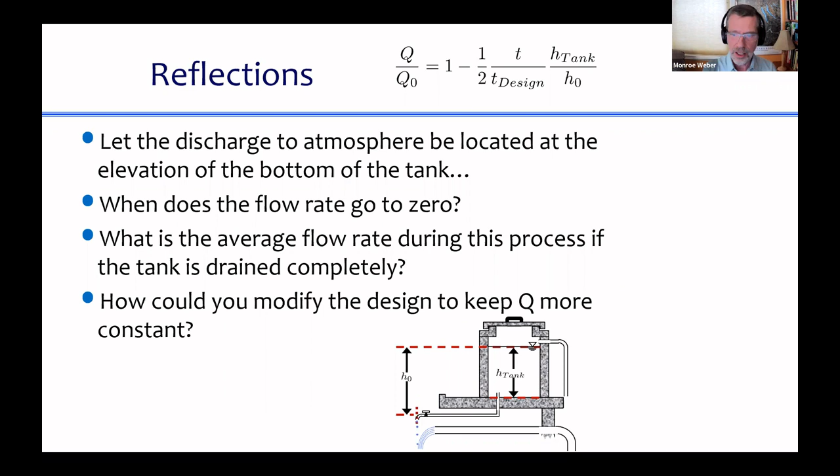We looked at one option: essentially a tank with a hole in the bottom. We realized we don't get constant flow rate, because the pressure or available energy that's there to push the chemical through the valve or orifice is decreasing as the chemical is being depleted, since it's being used. So that's problem number one—the change in head of the stock tank is going to cause us problems. That analysis, as a little aside, does get us something interesting.

We'll use that to design the system for emptying tanks, for draining tanks, because that's what it's doing—it's draining a tank, and in a water treatment plant we need to drain tanks. For example, this morning I was working on updating our flocculator, and the flocculator needs to have a drain system in it so that if you need to take it offline, you can open up some pipe ports and the flocculator will drain quickly, and then you can do maintenance on it. So there needs to be a design for that drain system. That's coming up in a second.

But I wanted to stress that what we discovered so far that was difficult is that the amount of chemical in our stock tank is changing over time, or the flocculator tank is draining over time, and so the flow out is going to be changing as well. We can figure that out using a combination of the energy equation and perhaps a minor loss coefficient, a minor loss equation.

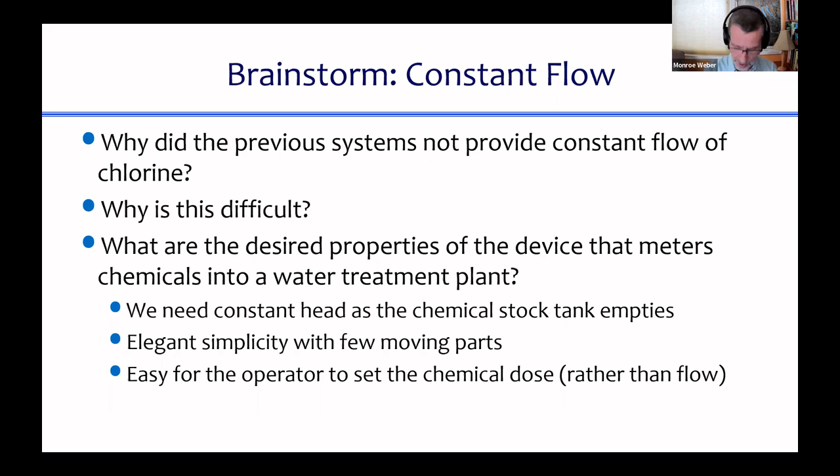So what we're looking for is a device that has a constant flow rate, even though the chemical stock tank levels are changing over time. We need some way to have a constant source of energy, of head, pushing the chemical through our control system. We'd like it to be elegant and simple with few moving parts, and we're not happy with just one flow rate. We want the operator to be able to easily adjust something and get a whole range of flow rates, without having to do that by trial and error. So those are things that we would like.

I said I'd do this quick aside on what's happening with draining a tank and trying to empty it. So you've got a tank, maybe an elbow at the bottom, and maybe a valve in that elbow. The equation I'm showing is a rework of the equation from a couple slides back, and it relates the minor loss coefficients—the sum of Ke, all the minor loss coefficients—the height of the tank, the width of the tank, the length of the tank, and the time you're willing to have it take for the tank to drain, and it gets you the required diameter of the pipe.

So it's a very simple, elegant equation that tells you how big the diameter should be on your bathtub drain if you want it to drain in less than 5 minutes, okay?

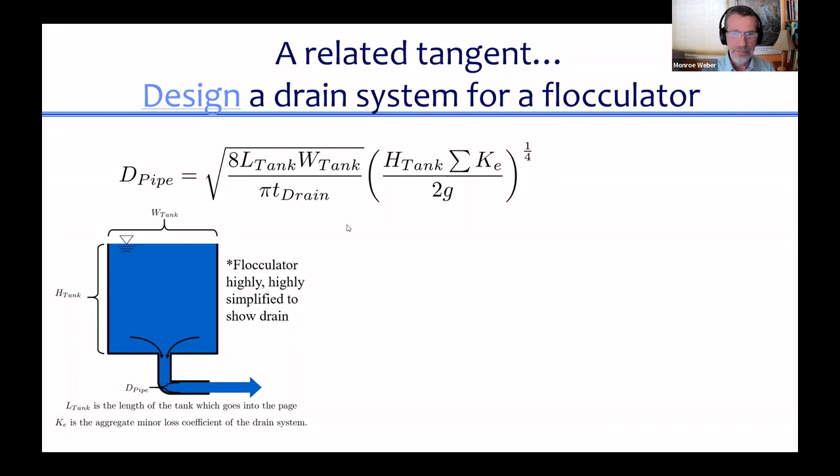So we use that equation or a similar version of it all the time. And just to make this real, these are the drains on the bottom of the sed tank - that's part of what went into determining how big those valves needed to be.

You might say, how did you figure out what that drain time should be? There's a trade-off here, because if you want to drain the tank in 15 seconds, you're going to need a monster pipe and a monster valve, and that's going to cost you a lot of money. But if it takes a week, your plant operator is highly annoyed because it took too long. So essentially, you're trying to figure out how long can I make this take and it not be annoying for the plant operator?

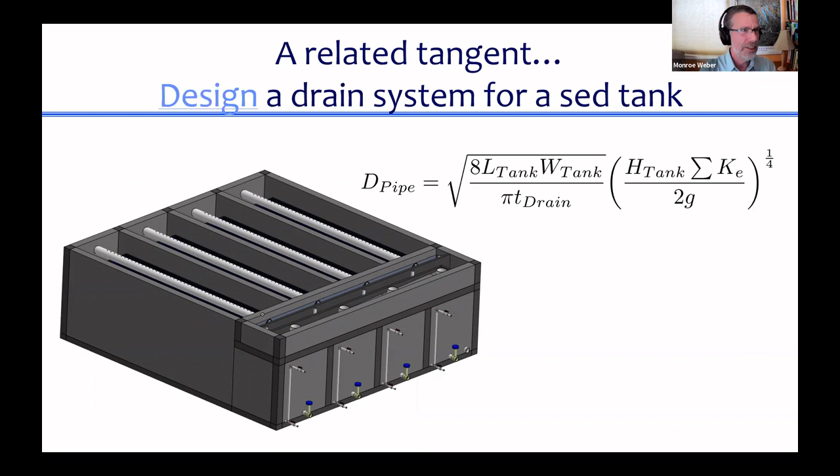My guess is that the length of time it should take to take a unit process offline and drain it is something like 15 minutes. If it's taking longer than that, the plant operator is going to be like, why is this taking so long? So that's where that time came from. It's really trying to understand the world from a plant operator's perspective that guides that decision.

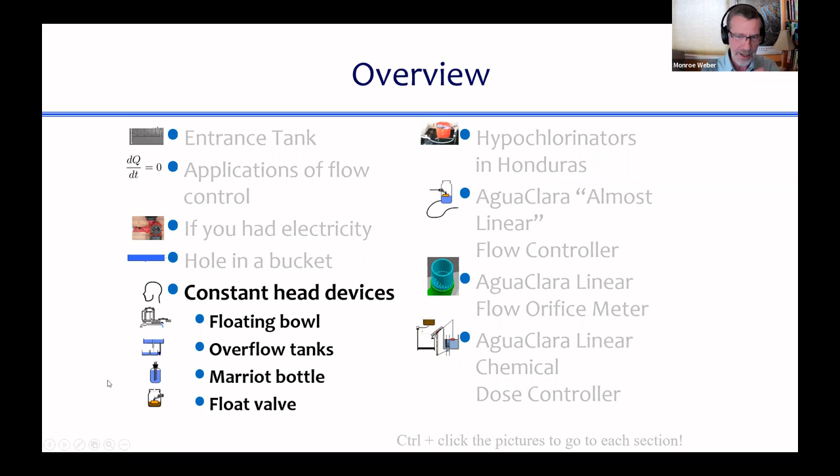So now we know we've got this problem of the head, or the level of the stock tank, varying. We need to figure out a way to get that out of the problem. So we want constant head devices, and we're going to talk about a few. I wanted to tell you where we're going - this is just a preview of where we're going eventually, hopefully by the end of today.

This is a view of the entrance tank and our doser system that is going to control the dosing of chemicals into that tank, sitting here. Unfortunately, I don't have everything shown yet, so the tubes that connect to this are not yet drawn. Hopefully by the end of this course that will all be finished and it'll be beautiful, but that's still a work in progress. So what happens if the flow rate through this entrance tank is 0?

You can see the scale on the wall there. If the flow is 0, the water level is way down in there, and there's a float on that lever system that is causing the lever system to angle and be, at this point, basically horizontal.

As the flow rate increases - so now I set the flow rate up to 50% of max. This plant is designed for 20 liters per second, it's running now at 10 liters per second. The water level has come up in the entrance tank by 10 centimeters, and that lever system has pivoted, and the level of these two outlets has changed because of that. We'll connect to that eventually.

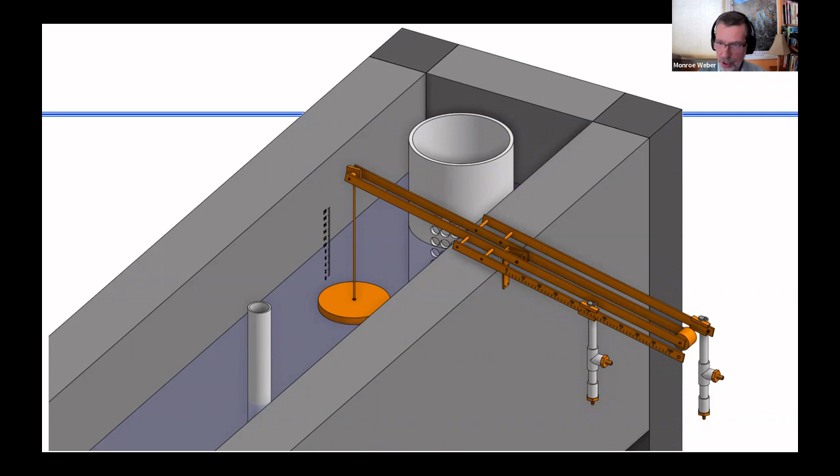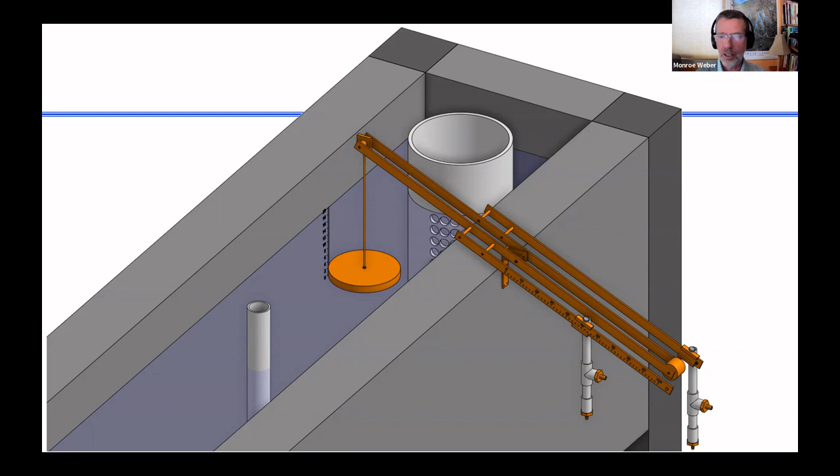This is at an even higher flow rate through the plant, and that lever system has moved even further. So this is our solution. What we're going to do today is slowly walk through and figure out how did we come up with this crazy design that ends up making it easy for a plant operator to adjust and control the chemical flow rate. So that was just a teaser.

Here's some of the pieces of that. So the first problem was, how do we get a constant head, which is get rid of the problem of the chemical level changing in the stock tanks.

A really cool idea that's been around for a long time is that you have a tank with your chemical in it, and you have a float - think a little plastic basin that's sitting inside that tank. And there's a flexible tube, this vertical tube that I show here. Don't ask me how it's nice and vertical and also flexible, just don't ask.

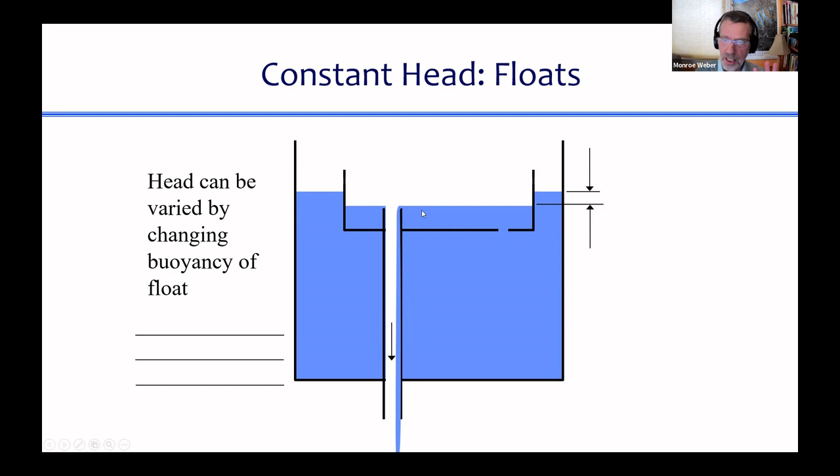And the flow into this float is set by this little orifice that's letting chemical flow in. And the driving head is that delta H - that's what's pushing the chemical from the stock tank into that little float container.

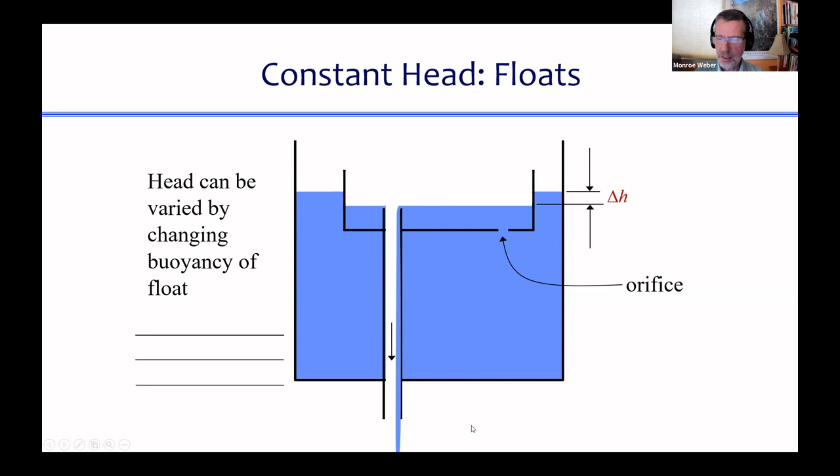And then that little float container has an overflow, and it's falling in free fall down through that dosing tube. And that pipe has supercritical open channel flow, which means it's free fall. What's really important about this idea of free fall or supercritical flow is that anything happening downstream in that tube transporting our chemicals cannot in any way influence how fast the chemical is entering at the top, because what's happening at the top is it's falling over the edge of a weir, and downstream doesn't influence it at all.

If you're puzzled by that - if you are at Niagara Falls and you do something to increase the water level downstream of Niagara Falls, that has absolutely no influence on the amount of water going over Niagara Falls, right?

So there's supercritical flow over Niagara Falls. What happens downstream is irrelevant to how much goes over. Climate change isn't going to affect us.

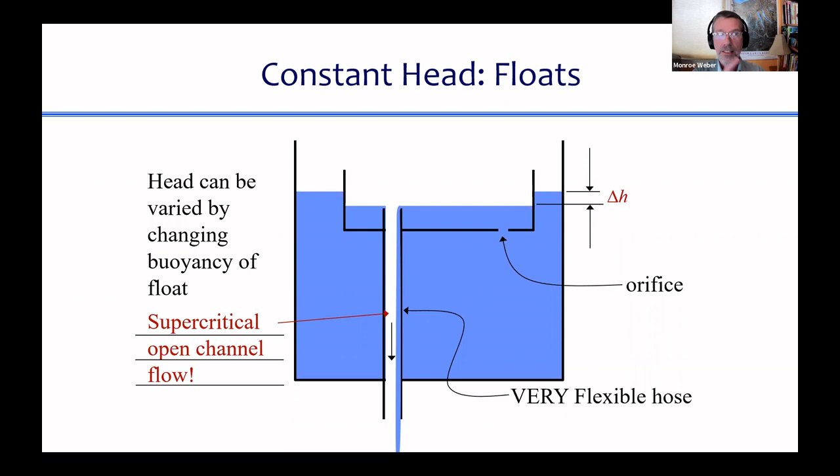Same thing happens here in that falling tube, and we're going to use that because that ends up being important. So it's unaffected by downstream conditions.

Here's an example of this. Remember, I showed you this little tank sitting on top of a big tank, a little chlorine tank sitting on top of a distribution tank for a village. And what I didn't show you is the original design. So here's the original design. There was a little float, and that float might have been like 4 PVC pipes in a square held together with 4 different elbows. Did you all draw that in your head?

The air in the PVC pipes is low density, so that frame is going to float on the surface of the chemical. And that float is then connected to a flexible tube, and the flexible tube has an orifice in the side of it.

So now it's almost the same as what we had before, maybe a little bit more elegant, where the pressure that's pushing the coagulant or the chlorine through that orifice is based on how deeply submerged that orifice is in the chemical. And as the chemical level drops, the float goes down with it.

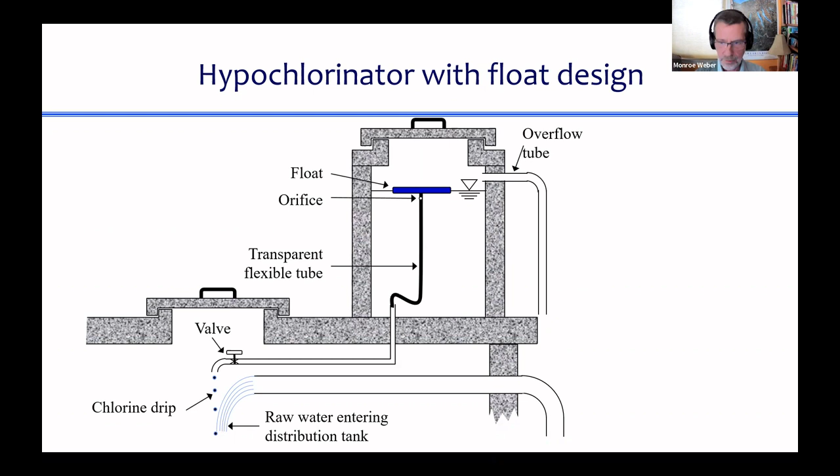So the height of chlorine above the orifice remains constant. So our goal is to adjust the flow rate and maintain it constant. That means we have to control the head, and we can think of the head like electricity. When they teach electrical engineers about electricity, they probably explain it's kind of like water. So now as civil and environmental engineers, when we talk about water, we need to teach you that it's kind of like electricity.

Have you all at some point learned something about resistance, voltage, and current, and got those relationships? Maybe some of you have. Okay, so head, which is what we talk about in civil engineering, refers to elevation change, analogous to pressure. It's the energy available to push fluid through a flow resistance.

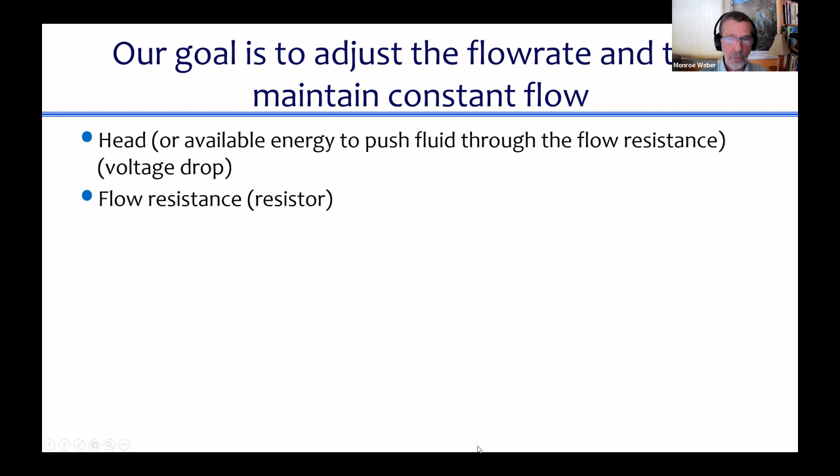That head is like a voltage drop, a change in voltage. And then we're going to have a flow resistance that could be the orifice, and this flow resistance is like the resistor in an electrical circuit. So one option is an orifice. Another option is porous media.

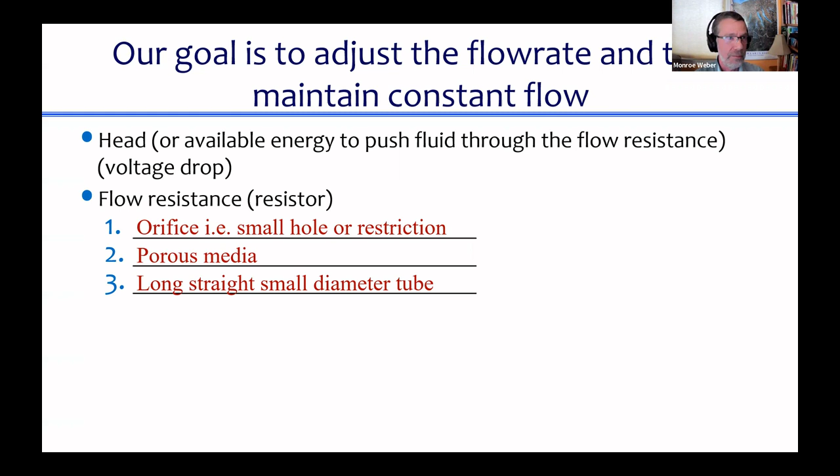This is just brainstorming about crazy things. We can put a bed of sand and have water flowing through sand, and the sand acts like a flow resistor. So this is true and a bad idea at the same time. Or we could have a long, straight, small diameter tube. Or we could have a short curved tube too, but the long, straight, small diameter tube is going to end up being the magic that we're going to use here.

So those are three options for flow resistance. And then we're going to somehow vary the head or the flow resistance. We could do either of those to vary the flow rate or the current. We could vary the head by adjusting the constant head tank elevation or the outlet elevation of a flexible tube, and I'll show how that's done in a little bit. Or we could vary the flow resistance by varying the orifice size.

So we wanted to be able to vary the orifice size going into that tube. If there could have been a valve installed in the side of that tube and you could adjust that valve, adjusting a valve open and close is essentially opening and closing or changing the diameter or size of an orifice. So we could play with that.

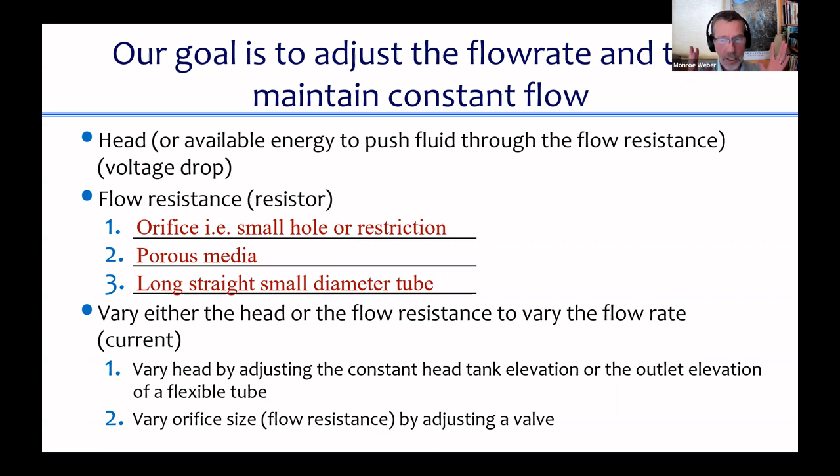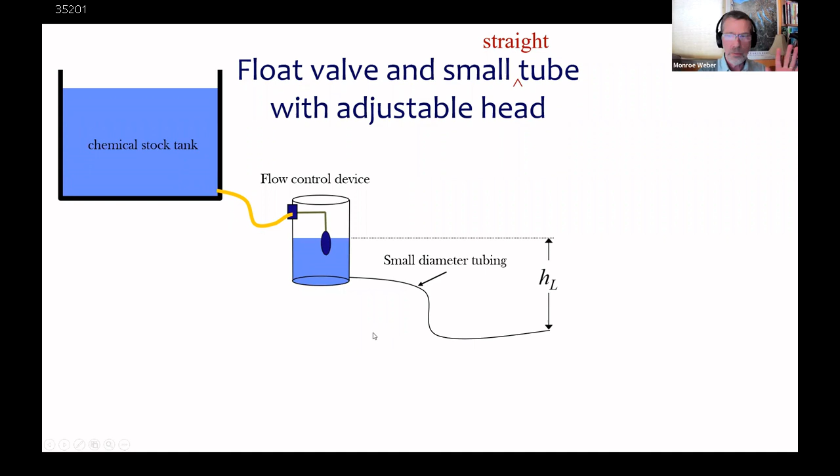So there's our friend, the energy equation. We're going to apply it between that control surface—remember my little trick—and that horizontal surface coming off the end of the tube. Then everything goes away: happily, the pressures are both atmospheric, the velocity through those control surfaces is 0, there's no pump, no turbine. So the head loss is just equal to the change in elevation between those two surfaces. That's elegantly done—we know what our head loss is.

Now we need to add an equation that connects head loss and flow. This could be the Hagen-Poiseuille equation—let me make sure I'm thinking about this right. So this is the Hagen-Poiseuille equation. If we neglect minor losses—inlet, outlet, and curved tubing losses—we can just use that equation, saying the total head loss equals the major losses, HF, and we can solve for Q.

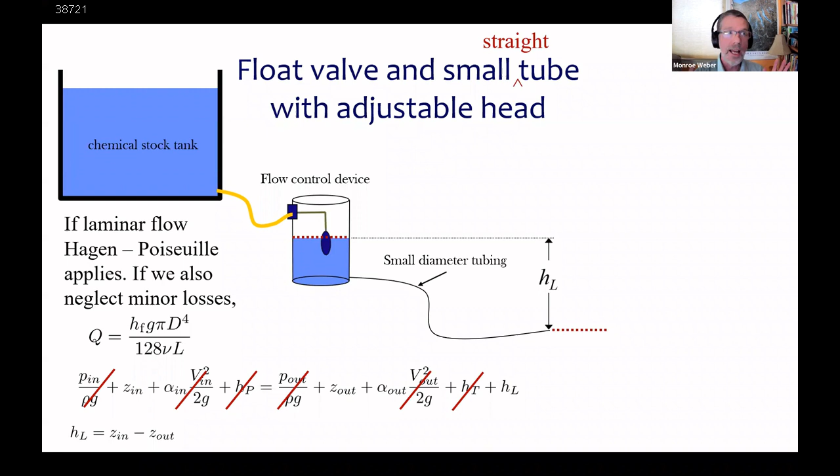This equation is beautiful—it shows that Q is proportional to HF. And if HF, the major losses, equals the total losses, that means if I take the end of that tube and move it up or down, I'll be able to adjust the flow rate, and it'll happen in a nice linear way. If I move the end of the tube up to the same level as the water in the constant level tank, Q will go to 0, because there's no driving head anymore—the driving head is 0, so the flow goes to 0.

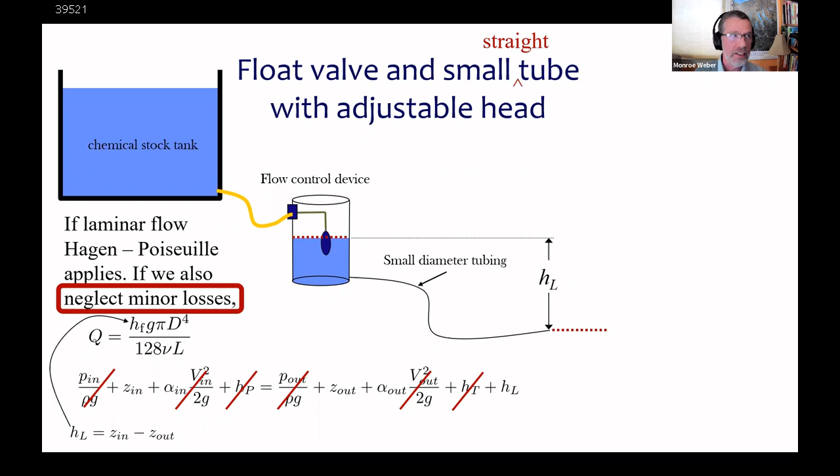So that's a really cool system. We are neglecting minor losses here, although you could bring them back in. So that is our first doser, and it's already pretty cool. It allows an operator to change the chemical flow rate, and it does it in a very simple way, just by moving a tube up and down.